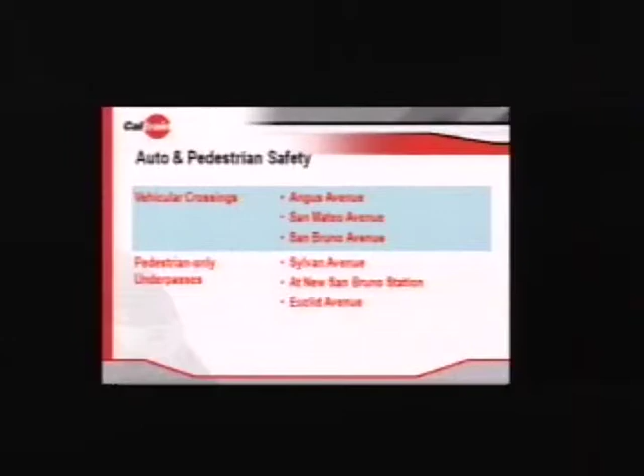2 contracts have been issued for this grade separation. One was for the box culvert, awarded back in February 2010 and completed in October 2010. The main contract was awarded in July 2010 and is ongoing.

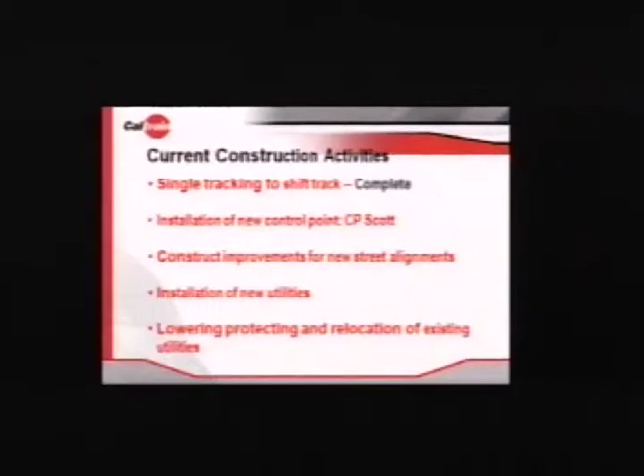So I'm going to go through some of the current construction activities right now. Mainly, what you see out there is a number of track activities, some civil improvements, some earthwork, etcetera, and a large number of utility improvements are ongoing.

As to street closures, we had 2 weekend closures of Scott Street, and those are complete. We had 2 weekend closures of South Linden, and that's complete. Looking forward, we have a full closure of First Avenue at San Mateo at Melody, which will be a permanent closure happening later this summer, as well as the cutover to the Shoofly, which I'll discuss later, but involves a major closure of all three intersections.

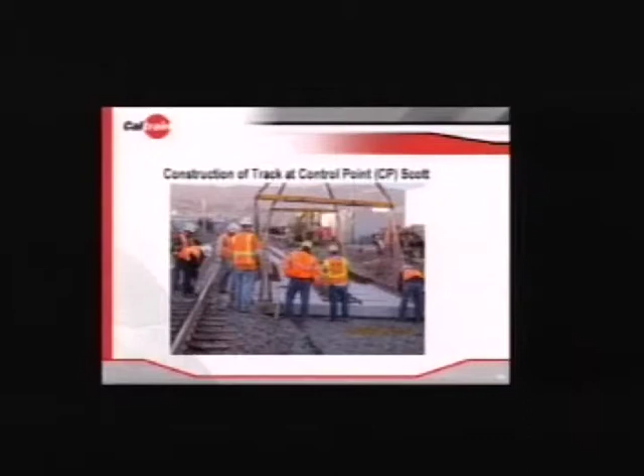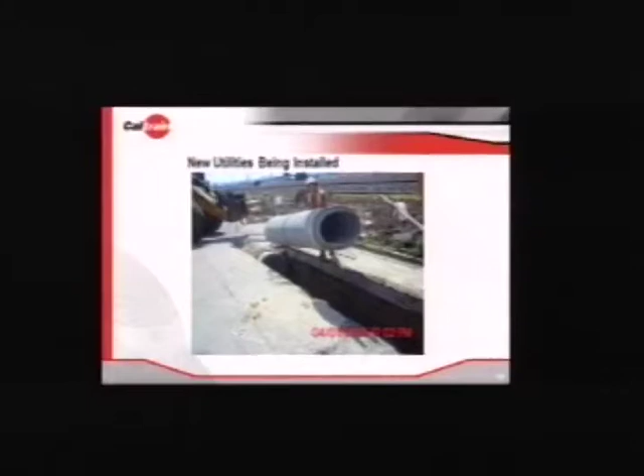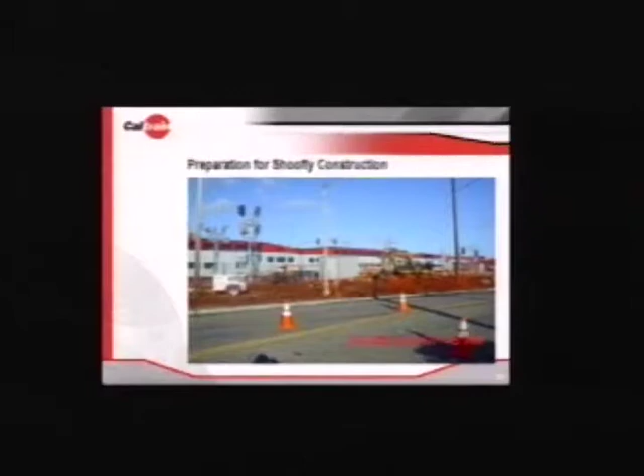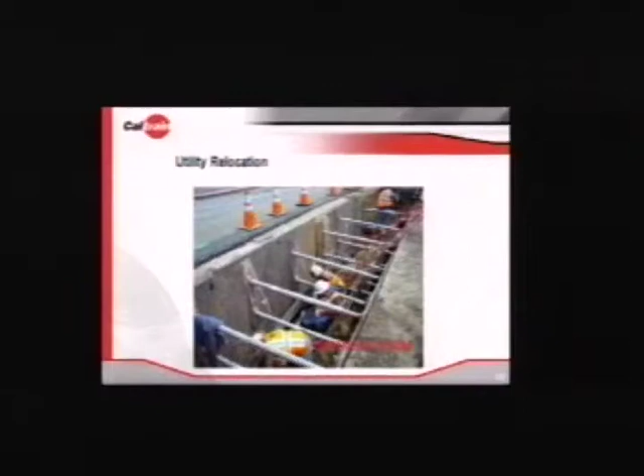And some of the utility relocations - this is actually AT&T, we're moving some fiber optic cables. And actually in this slide, they're lifting the fiber to get a sewer under it.

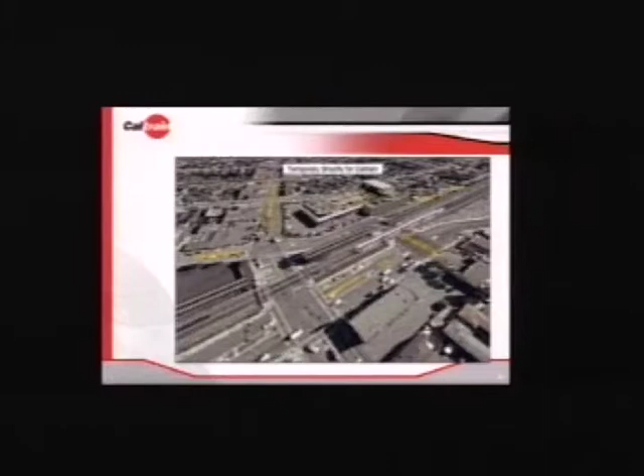In approximately a 3-month window, you're going to see the construction of the Shoofly, which is a temporary bypass for our tracks, located immediately to the east. So you can see the existing CalTrain tracks, and you can see the beginning of the CalTrain Shoofly.

So what's going to happen in the next 3 months? The main activities will be construction of the Shoofly, all the way from Scott Street down to the existing station, so quite a bit of construction there. You're going to see some of the major utility relocations completed: fiber optic, AT&T, some PG&E work. The temporary station will be constructed immediately to the south of the existing station during that time frame, as well as a public outreach meeting.

During the next 3 months, some of the impacts residents may see include: no more street closures in the next 3 months, so we're done at Scott and Linden. However, you'll continue to see lane closures at San Mateo, Huntington, and San Bruno periodically. There will be some minor night work, less than what you've previously experienced, because at this point we're primarily testing, not major civil work like you saw previously.

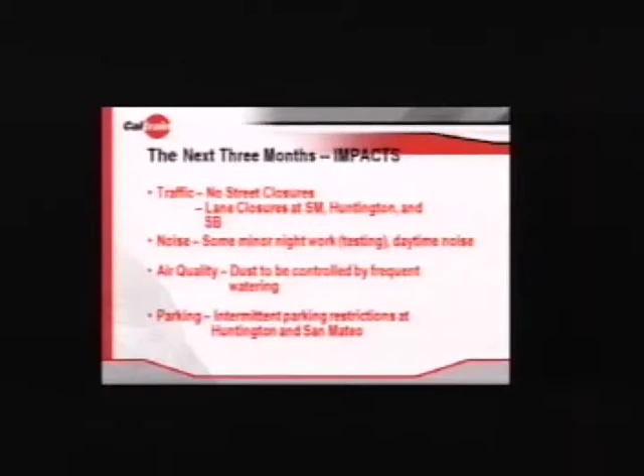Air quality, we continue to monitor and mitigate using watering to mitigate dust. Parking, there'll be intermittent parking restrictions, primarily at Huntington and San Mateo, but on other streets as well.

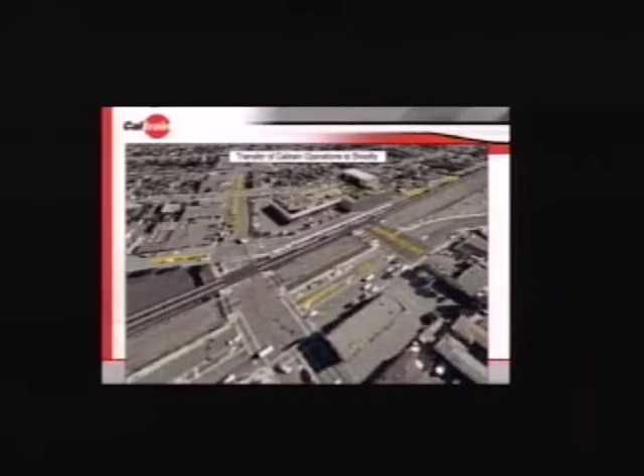Within a 6-month horizon, the Shoofly will be completed. CalTrain will then be running on the tracks to the east, and we will have demoed out the existing crossings at all 3 crossings. So by the end of 2011, this 6-month look ahead, we'll have cut over to the Shoofly, which will take place sometime in early fall of this year.

Immediately after that, pile driving activity will begin. You'll see pile driving at San Bruno, San Mateo, and Angus all happening one after another, and then removal of the existing tracks and excavation for grade separation. That's important to note because when we start excavating, there will be a marked increase in trucking due to all the off-haul. We will also begin construction of the bridges at San Bruno, San Mateo, and Angus, so you won't see the bridges themselves, but you'll see the abutments going in.

Some of the impacts expected during this 6-month time frame include the closure I spoke about, a 1-week phased closure. Friday night through early Saturday morning, all 3 crossings, San Bruno, San Mateo, and Angus will be closed. The first to open will be San Bruno, open that Saturday morning for emergency traffic, followed later that day by regular traffic. San Mateo is the next crossing to open, at 0500 Monday. Angus will remain closed for a week. This is obviously a major closure; we'll notify well in advance, but that's the next and last big major street closure.

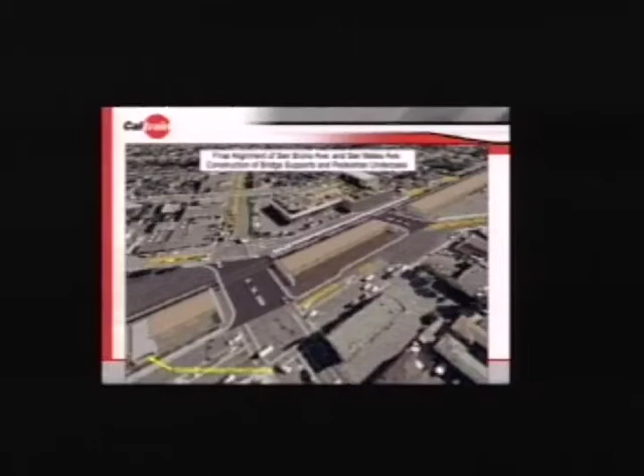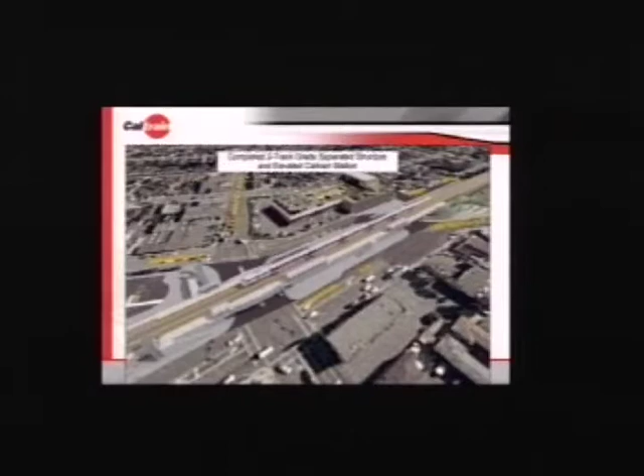Jumping ahead to the rest of the project, now with the Shoofly you see the beginning of the MSE wall construction, and in the lower left corner the beginning of the pedestrian underpass. In the middle of the screen is actually the bypass for San Bruno. Because San Bruno doesn't move from its current location, we have this cowboy hat, or donut, bypass involved. Further along you see continuing work building the abutments, final street alignments, lowering of the streets, bridges under construction, part of the station completed, Posey Park up in the top right corner, and then the final station alignment with the transit center and all improvements in place.

Some of the community outreach efforts that Clara mentioned: we've held community meetings, we had a project kickoff event to shepherd in the project, we have weekly construction updates that go to city staff, weekly constituent contact reports where we report on all concerns the community may have and what measures we're taking to address those, and we mail and email out construction notices for various phases of the work.

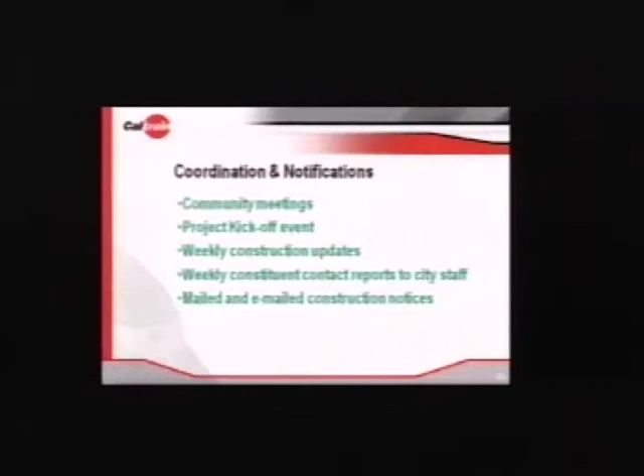This gives you an idea of the number of complaints and the number of resolved complaints. I should mention that in addition, the city themselves have received 7 complaints, and all 7 have been resolved by city staff.

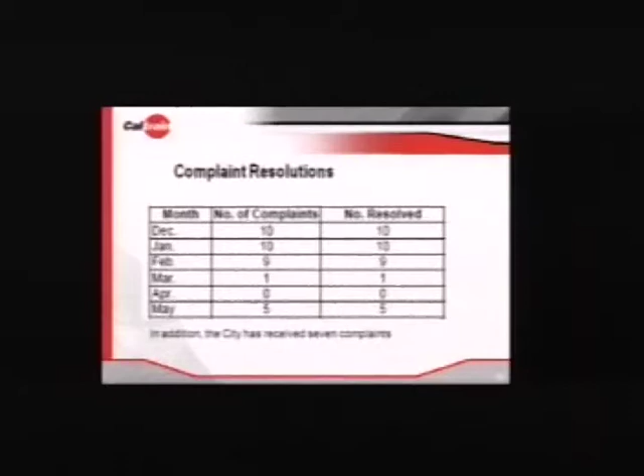You can see in just gross numbers that there does seem to be a trailing off. At least initially, there were a lot more questions. People were more curious than anything. As work has continued to progress, those numbers have decreased.

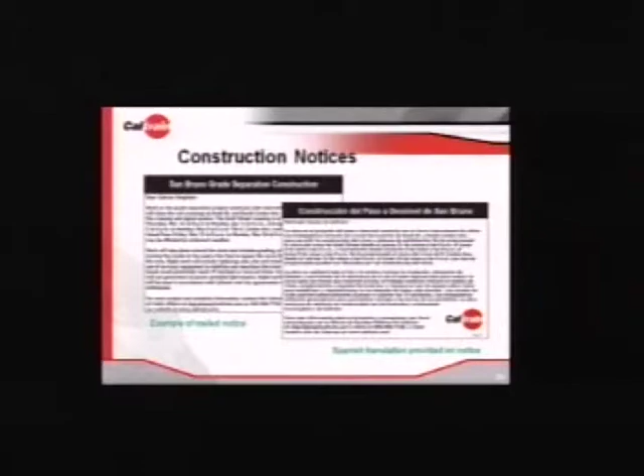Here's an example of some of the construction notices that you may have seen mailed out to the community. We do it in English and Spanish, and we target that towards the specific area that is going to be most affected, as well as try to time it so we're not too far in advance. We find if we tell people 12 months in advance, people just file it in the garbage can. But if we tell them a day before, it's too late. So we try to give them a decent window to find alternate routes if necessary.

The community outreach meeting will actually be tentatively scheduled for July 13th. It'll be held at Bel Air School as the previous ones were. We will send out a mailer, and when we have a hard date, we'll post it on the city website so everybody has access. During that outreach meeting, we'll provide updates with specific dates and impacts to the community, discuss upcoming impacts and how they affect the community, and answer any questions anyone might have.

Any questions? Through the chair, just if you could give us a quick update very quickly on what areas of concerns or complaints you received from residents?

The main concern, well initially, there were mostly questions about timing. We received a number of questions about that, and a number of questions regarding utilities in particular. There were residents concerned about drainage, with some pretty specific questions regarding that. Most of our concerns are revolving around night work, obviously people who are impacted during these weekend windows where we do have to do night work. Those, I think, have been the most recent ones we've gotten.